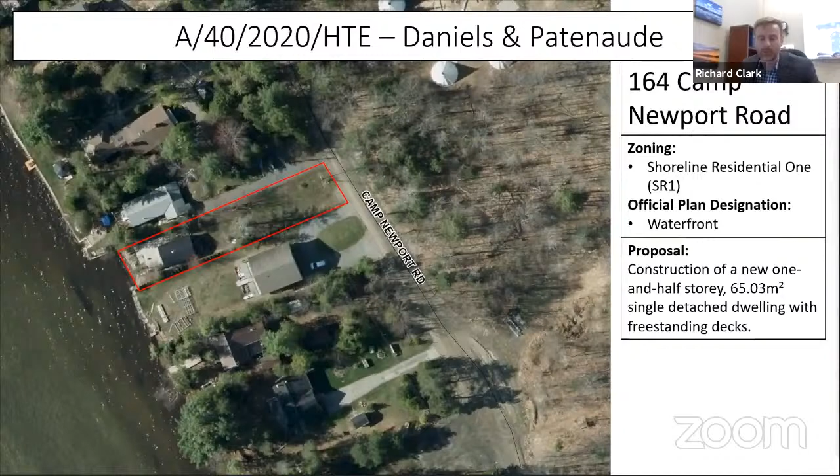And I'll just show you that. So the dwelling is in the same location as previously proposed, as you previously saw it on July 14th. It's been made smaller, and there are now freestanding decks located in the northern side yard and front yard.

A minor variance is required to increase the primary lot coverage from 10% to just 10.4%, and to reduce the required side yard setback from 6 meters to 2.5 meters for the dwelling, on both sides.

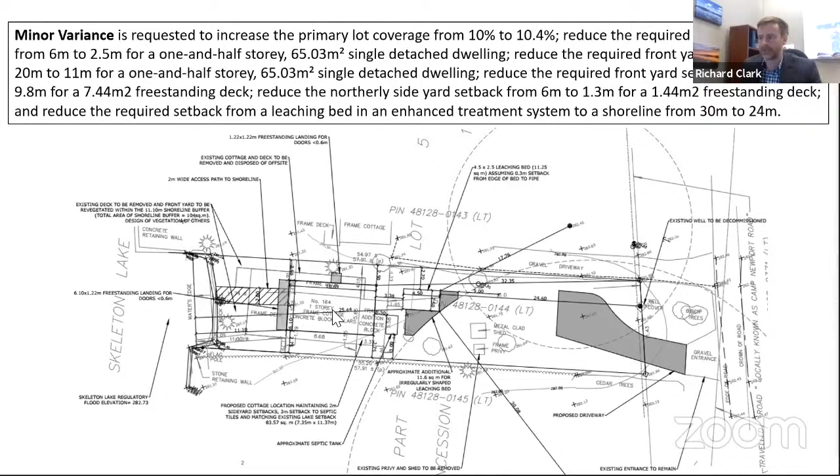Reduce the required front yard setback from 20 meters to 11 meters. Reduce the required front yard setback from 20 meters to 9.8 meters for this 7.44 square meter freestanding deck. Reduce the northerly side yard setback from 6 meters to 1.3 meters for this 1.44 square meter freestanding deck. And reduce the required setback from a leaching bed in an enhanced treatment system to the shoreline from 30 meters to 24 meters, and that's this setback here.

As previously noted, a 67.85 square meter one-story dwelling with a 66.64 square meter attached deck, a 3.39 square meter shed, and a 1.63 square meter privy toilet existed on the property prior to the fire. However, not all aspects of the structures that existed on the property prior to the fire would have been legal non-complying, as it appears additions to expand the footprint of both the dwelling and deck occurred without approvals.

As committee was advised on July 14th, 2021, if the dwelling and deck additions are assumed not to have been established on the site lawfully, the legal non-complying dwelling and deck aspects would be reduced to approximately 49 meters squared and 34 meters squared, implying that the existing lot coverage of 13.28% existed on the property for legal complying and non-complying structures prior to the fire.

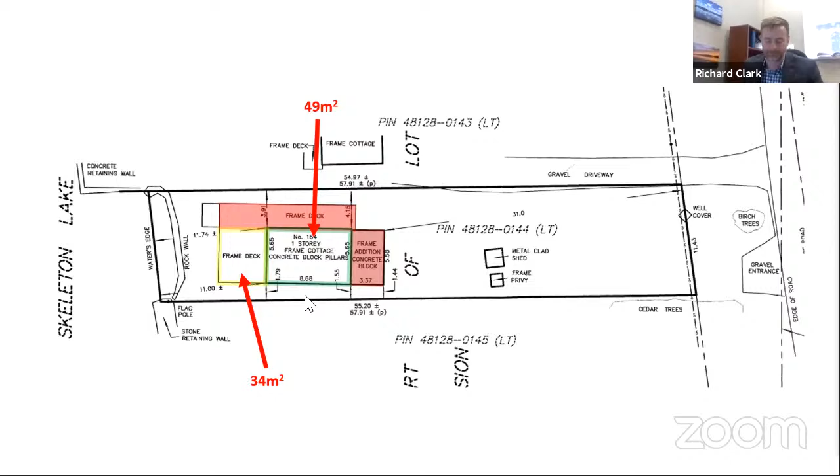This slide shows the July 14th proposal and the October 13th proposal side by side to help illustrate the redesign. The new proposed smaller dwelling, down from 83.57 meters squared to 65.03 meters squared, maintains a 2.5 meter setback, whereas before it was 2 meters on both the north and south side, to address concerns raised by abutting landowners.

Also to address concerns from abutting landowners, the detached garage is no longer proposed. To facilitate the reduced width of the dwelling, a side entrance is proposed on the north side of the dwelling and at the front facing Skeleton Lake. This was to save space by eliminating the need for a central hallway in the building. Freestanding decks associated with these entrances are proposed to permit these entrance locations, with projections of 1.2 meters into the north and west of the dwelling.

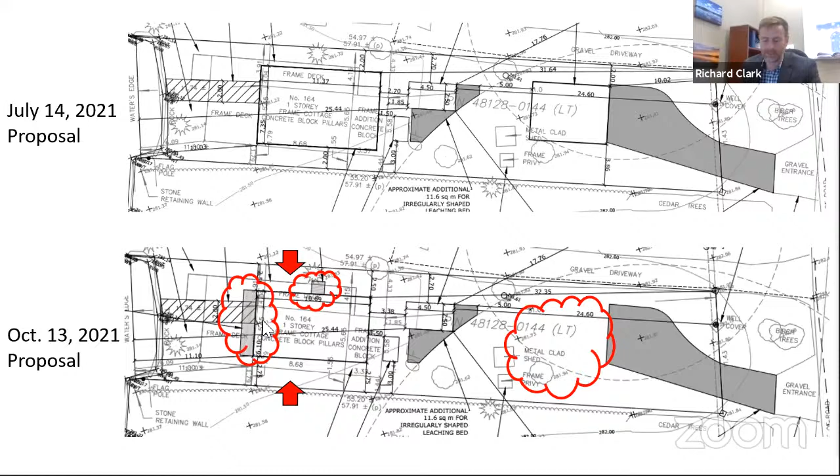The redesigned dwelling is shown here. Elevations show a cottage that has been redesigned at a significantly reduced scale to address the site constraints and match the surrounding neighborhood character. While the redesigned dwelling is still encroaching within the 30-meter setback and 15-meter wide shoreline buffer, the smaller scale of the dwelling implies that these encroachments are now reduced over what had previously been proposed.

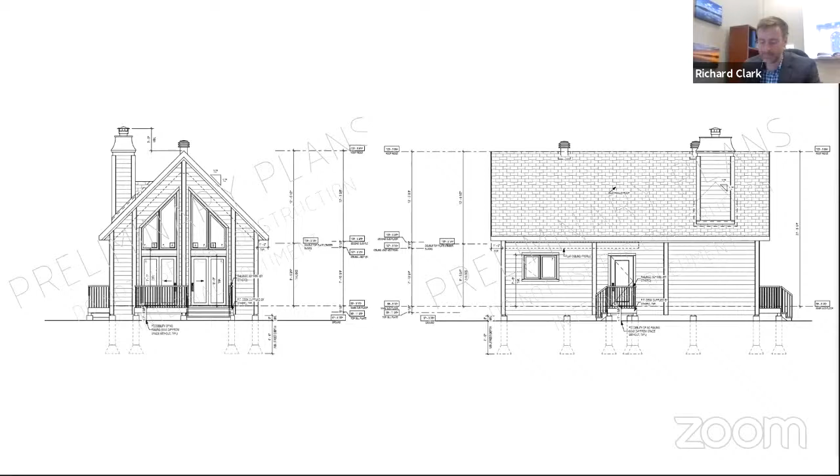Additionally, the landowner has agreed to undertake revegetation between the proposed new dwelling and the lake, as well as elsewhere on site where space permits, to offset the area of encroachment within the typically required shoreline buffer and setback. Given that a septic system with enhanced treatment and site revegetation within the buffer and elsewhere is now proposed, staff are of the opinion that the applicant's modified proposal provides appropriate compensating measures, which are required in town official plan policies where development is proposed within 30 meters of a cold water lake or lake trout habitat.

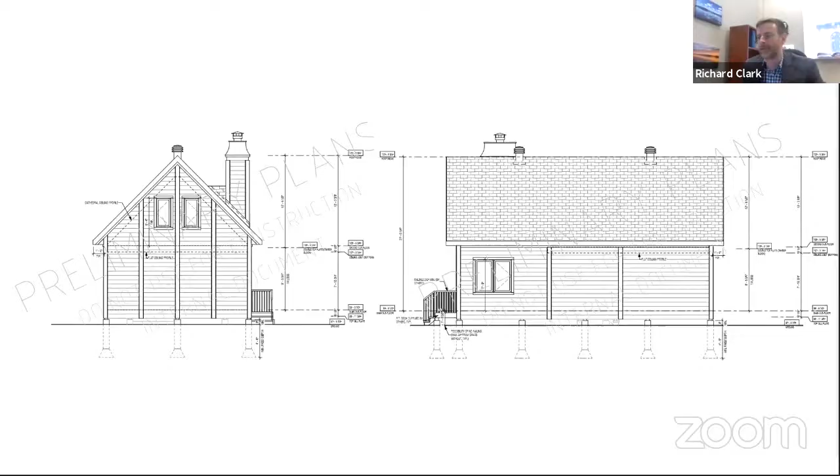The application was circulated in accordance with the provisions of the Planning Act and the Skeleton Lake Association, and no written comments were received. It's noted that letters of support were provided by the abutting landowners, who were individuals that previously shared concerns respecting past approvals.

The application would appear to conform to the intent of the official plan and be consistent with the provincial policy statement. Additionally, the application appears to satisfy the four tests for a minor variance as set out in section 45(1) of the Planning Act, and therefore staff are recommending conditional approval. A condition relating to the implementation of required revegetation measures through site plan control is recommended.

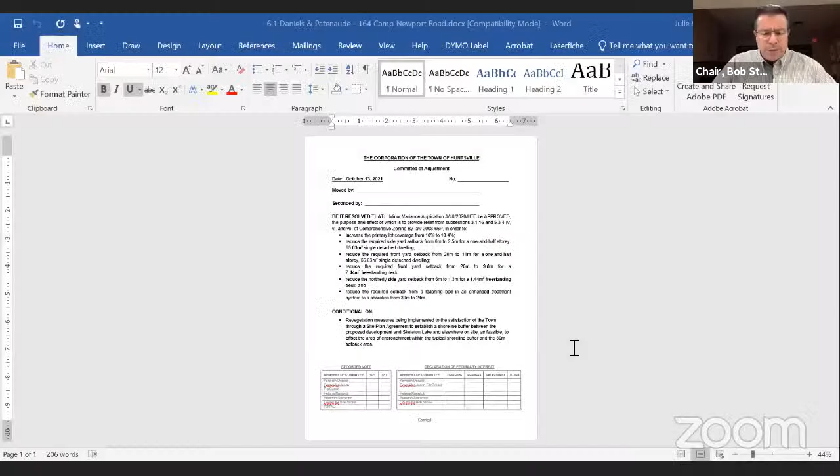I will read the resolution. Moved by Jason Fitzgerald, seconded by Brandon Stapleton. Be it resolved that minor variance application A40 2020 HTE be approved. The purpose and effect of which is to provide relief from subsection 3.1.16 and 5.3.4 of the Comprehensive Zoning Bylaw 2008-66P, in order to increase the primary lot coverage from 10% to 10.4%, reduce the required side yard setback from 6 meters to 2.5 meters for a 1.5 story, 65.03 square meter single detached dwelling.

Reduce the required front yard setback from 20 meters to 11 meters for a 1.5 story, 65.03 square meter single detached dwelling. Reduce the required front yard setback from 20 meters to 9.8 meters for a 7.44 square meter freestanding deck. Reduce the northerly side yard setback from 6 meters to 1.3 meters for a 1.44 square meter freestanding deck. And reduce the required setback from a leaching bed in an enhanced treatment system to a shoreline from 30 meters to 24 meters, conditional on revegetation measures being implemented to the satisfaction of the town through a site plan agreement to establish a shoreline buffer between the proposed development and Skeleton Lake, and elsewhere on site as feasible, to offset the area of encroachment within the typical shoreline buffer and the 30-meter setback area.

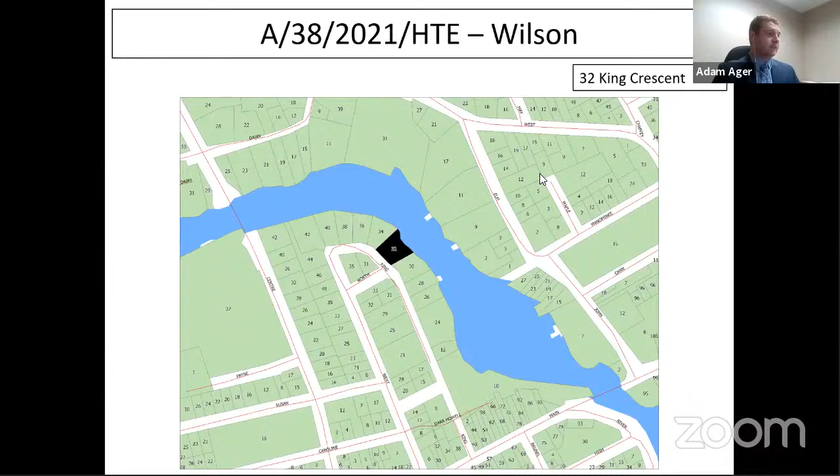Through you, the subject property is located at 32 King Crescent. The lot is designated urban shoreline residential, and the lot is zoned residential 1. An application has been submitted to recognize the location of a retaining wall within the shoreline buffer, and also increase the accessory lot coverage from 5% to 5.13% for the proposed floating dock. So here on the sketch, you can see there are 2 retaining walls, existing on site now, outlined in this dark gray color. And then the addition for accessory structure is this proposed floating dock located here on the sketch.

Section B of the official plan requires lot frontages to be maintained in a natural state to a depth of 15 meters where new lots are being developed. It also states that where lots are already developed or further development is proposed within this urban shoreline residential area, these targets should be achieved to the furthest extent possible. Where these requirements cannot be met, a net improvement over the existing situation is required. Given the location and scale of these being within the 15 meters, staff are of the opinion this development does not represent a net improvement to what was previously there, and this policy is not being maintained.

Further to that, during the installation of the retaining wall, it was determined that the integrity of a butternut tree, which is an endangered species under the Endangered Species Act, was compromised. Staff are recommending consultation with the Ministry of Environment, Conservation and Parks, specifically regarding the applicable requirements of the Endangered Species Act concerning this tree potentially impacted by the retaining wall construction.

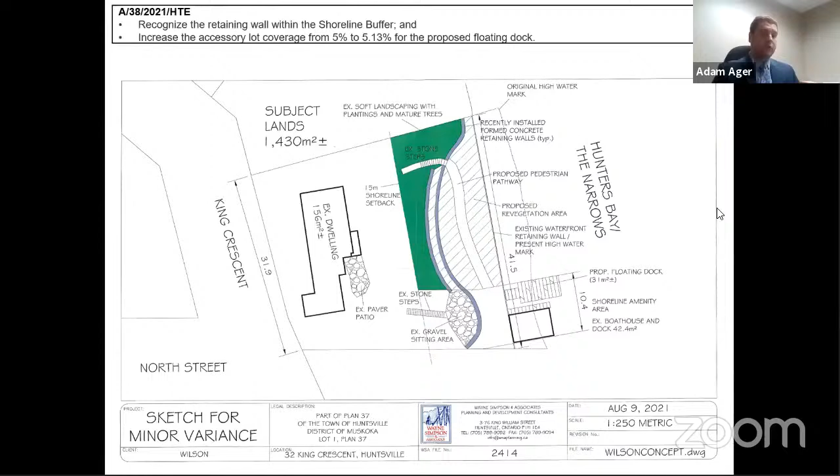A condition has been included to ensure that future works benefit from the site plan control process. Here are some site photos showing the scale of the accessory structure or retaining wall. As you can see, it's in two tiers, and the entire shoreline area is now gravelled as well. Here are some more photos.

The application was circulated in accordance with the provisions of the Planning Act, including to the Vernon Ferry Lake Association. No comments have been received.

Staff are of the opinion that a portion of the minor variance respecting the recognition of the retaining wall within the shoreline buffer is not a minor variance, does not meet our official plan policies, and does not satisfy the four tests of a minor variance. As a result, staff are recommending that that portion of the application be denied.

Further, with respect to the application for increased accessory lot coverage, staff are of the opinion that that portion of the variance application is minor in nature and satisfies the four tests of a minor variance, and should be approved for the floating dock only, conditional on removal of the non-complying retaining wall and revegetation to establish a suitable shoreline buffer within 15 meters of the Muskoka River shoreline. And lastly, conditional on consultation with the Ministry of Environment, Conservation and Parks regarding the butternut tree.

And I'd be happy to answer any questions you may have.

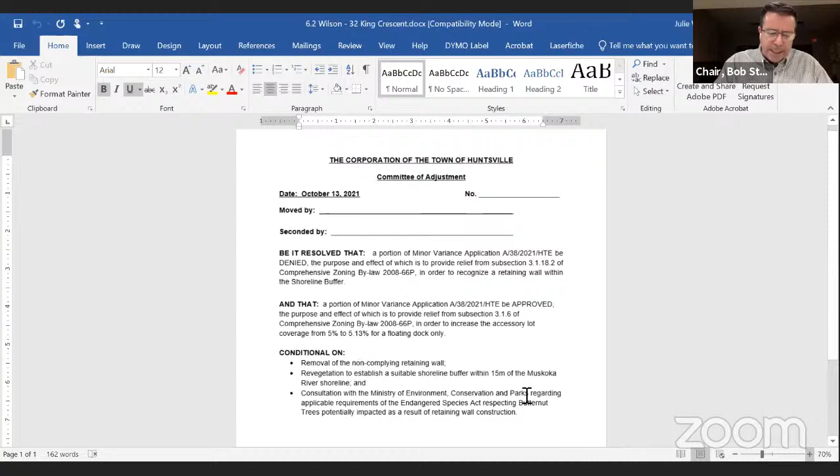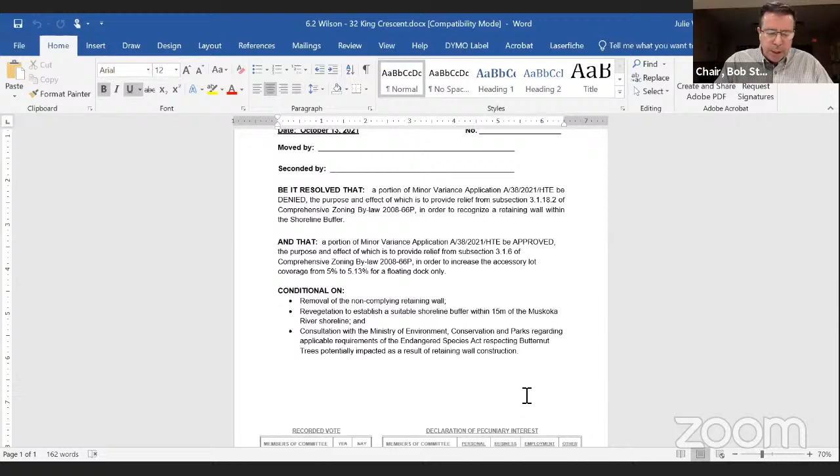The purpose and effect of which is to provide relief from subsection 3.1.18.2 of the Comprehensive Zoning Bylaw 2008-66P in order to recognize a retaining wall within the shoreline buffer, and that a portion of the minor variance A 38/2021 HTE be approved. The purpose and effect of which is to provide relief from subsection 3.1.6 of the Comprehensive Zoning Bylaw 2008-66P in order to increase the accessory lot coverage from 5% to 5.13% for floating dock only.

Conditional on removal of the non-complying retaining wall, revegetation to establish a suitable shoreline buffer within 15 meters of the Muskoka River shoreline, and consultation with the Ministry of the Environment, Conservation, and Parks regarding applicable requirements of the Endangered Species Act respecting butternut trees potentially impacted as a result of the retaining wall construction.

All in favor? And that's carried.

Thank you, Adam. We are now moving on to the next application, the Schurr and Matutat application. That's fun to say.

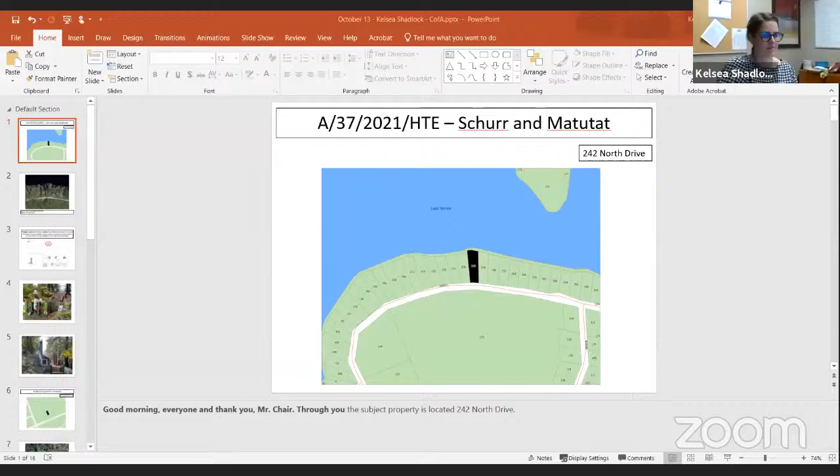Thank you, Mr. Chair, I'll just share my screen. Are you able to see? Yep, thank you. Good morning, everyone, and thank you, Mr. Chair.

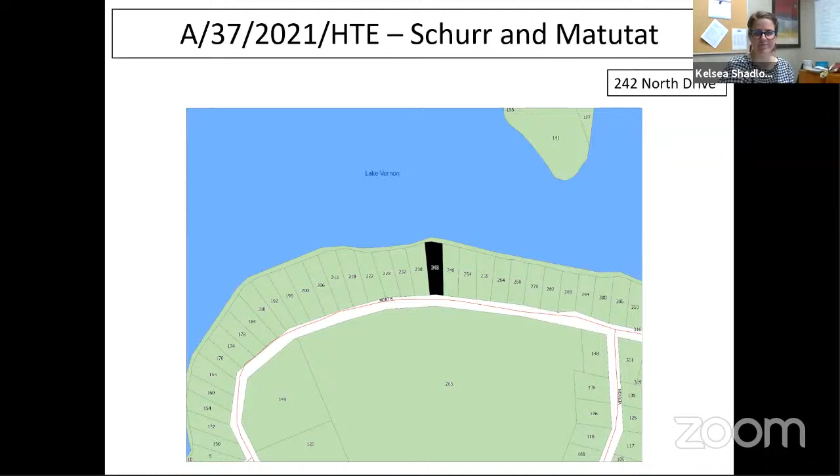Through you, the subject property is located at 242 North Drive. The lot is designated waterfront and is zoned shoreline residential 1. The application has been submitted to permit the construction of a 25.6 square meter four-season sunroom addition. A minor variance is required to decrease the 6-meter required interior side yard setback to 3.9 meters for the sunroom addition only.

The SR1 zone requires a 6-meter interior side yard setback for single detached dwellings. The purpose of this provision is to ensure adequate distancing between development on abutting lots and to create a buffer between properties. The proposed sunroom addition is compliant with all other required setbacks and lot coverage. Additionally, the sunroom addition is buffered by existing vegetation and is replacing a portion of a non-compliant deck.

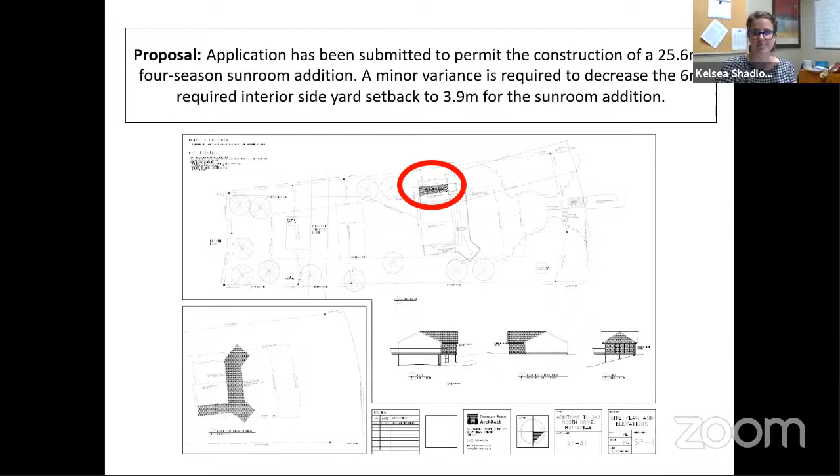The subject lands are included in the waterfront designation of the official plan, which anticipates low density shoreline residential development that respects the character of the natural setting of the waterfront area. For this proposal, there will be minimal visual impacts from the water as the sunroom addition will be hidden by existing vegetation. The sunroom addition reflects the scale of the dwelling and surrounding waterfront character. Additionally, the sunroom addition is sited in the most appropriate location as it maintains existing building lines and is in a partially cleared area and does not encroach into the front yard setback.

Just going back a bit - the natural constraint mapping identifies deer wintering habitat and unevaluated fish habitat in the front of the property. To address these natural constraints, a fish habitat and deer wintering habitat assessment was completed by Riverstone Environmental Solutions, Inc. The report provides the background of fish habitat and deer wintering habitat, as well as an overview of the site conditions. The report concludes that there is a low likelihood of negatively impacting the fish and wildlife habitat and characterizes the fish habitat as type 2.

Recommendations including the implementation of construction mitigation measures to further reduce any disturbances in the riparian area and the retention of existing tree cover will be implemented through site plan control should the minor variance be approved. The application has been circulated in accordance with the provisions of the Planning Act and to the Lake Vernon Association. Three letters of support were provided to committee prior to this meeting. The application would appear to conform to the intent of the official plan and be consistent with the provincial policy statement. The application appears to meet the four tests of a minor variance and therefore staff are recommending approval. Thank you, and I'd be happy to answer any questions you may have.

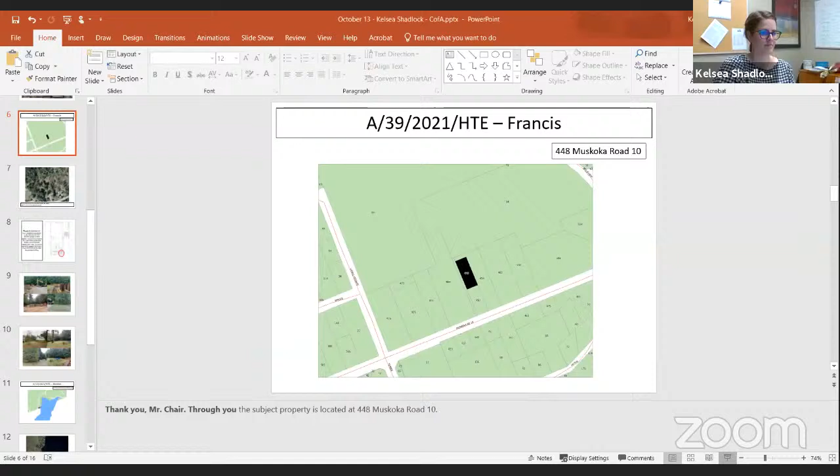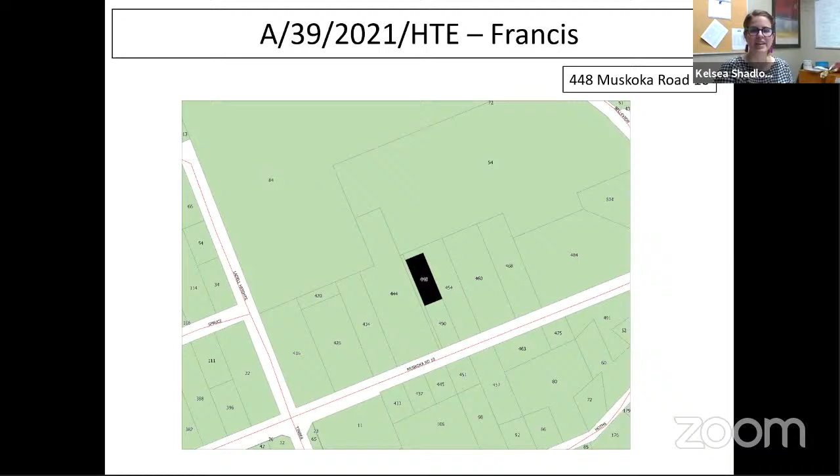Well, thank you again, Mr. Chair. Through you, the subject property is located at 448 Muskoka Road 10. The lot is designated community residential and is zoned residential 1 exception 0206.

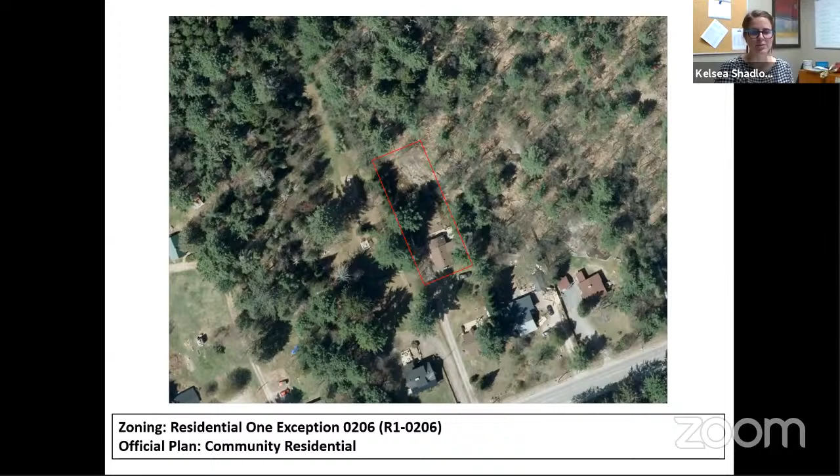The application has been submitted to permit the construction of a 26.75 square meter detached garage. A minor variance is required to recognize the south lot line as the front lot line, reduce the front yard setback from 7 meters to 1.5 meters, and to permit a garage to be located closer to the front lot line than the principal dwelling.

The site-specific exception permits the existing lot area and lack of frontage. A consent application in 2013 adjusted the lot line between the two existing undersized lots that were developed as a front road abutting lot and a back lot. A zoning amendment in the same year recognized 0 meters of frontage on the municipally maintained road and the lot area of the subject property.

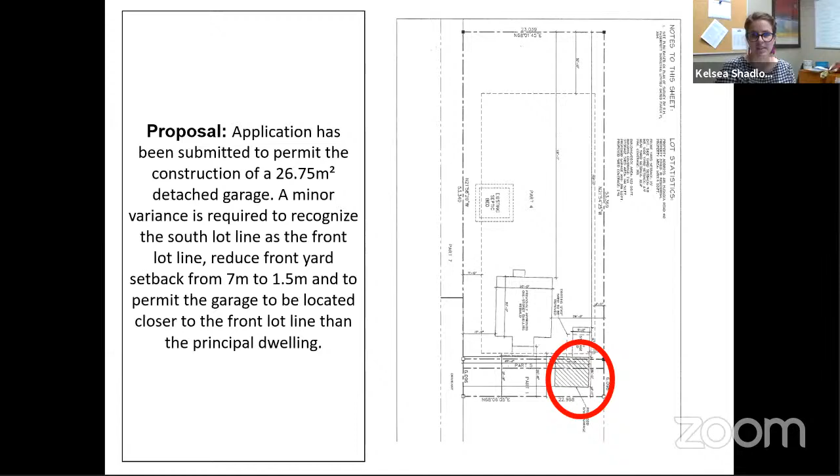The previous applications did not assign any setbacks to the lot line. Therefore, the recognition of the south lot line as the front lot line is important for the relief sought, as well as for any future development.

With regards to the requested relief, the general provisions of the town's zoning bylaw require that detached garages be located no closer to the front lot line than the principal dwelling. The purpose of this provision is to ensure adequate setbacks and sight lines are maintained, and further that the street presence and character are consistent.

Relief is also required to reduce the front yard setback for the proposed detached garage. The intention of this setback is to ensure adequate distancing between developments on abutting lots and to create a buffer between properties and the road.

In this instance, the proposed detached garage will be hidden from the road by the abutting lot, mitigating potential adverse impacts with respect to visual, traffic, and safety impacts. Additionally, the location of the garage is informed by the existing conditions and is within a previously developed area. There's also a small vegetated area on the east side of the south lot line, which helps screen the proposed garage from the abutting property.

The subject lands are designated community residential within the official plan. Within this area, permitted uses shall be limited to low density residential, and the continued residential use is in keeping with the official plan.

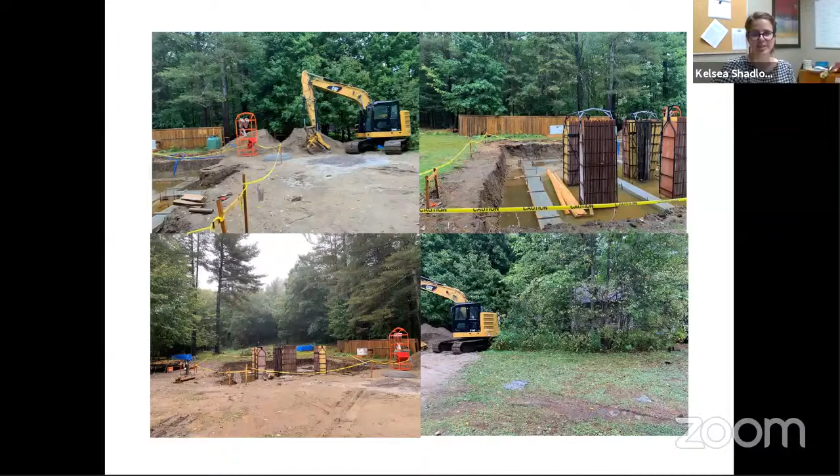The application was circulated in accordance with the Planning Act. No concerns or objections have been raised. The Planning Department had no objections. However, they note that the footprint of the property line needs to be pinned by an Ontario land surveyor.

Therefore, the application would appear to conform with the intent of the official plan and be consistent with the provincial policy statement. The application appears to satisfy the four tests of the minor variance, and staff are recommending approval. Thank you so much, and I'd be happy to answer any questions you may have.

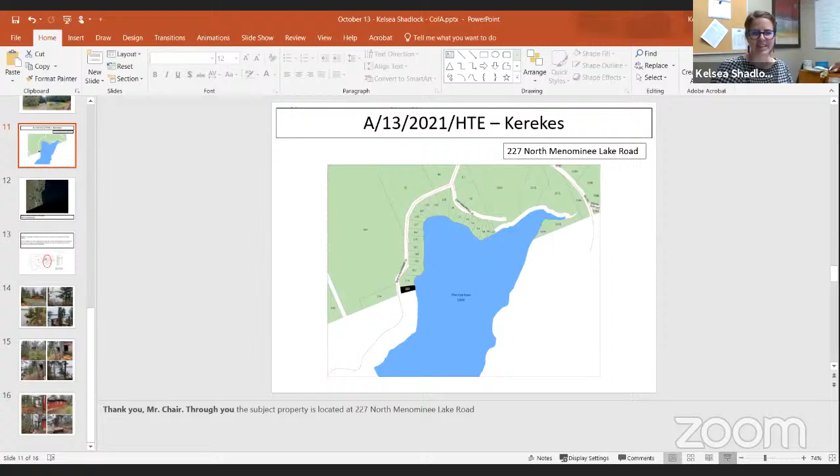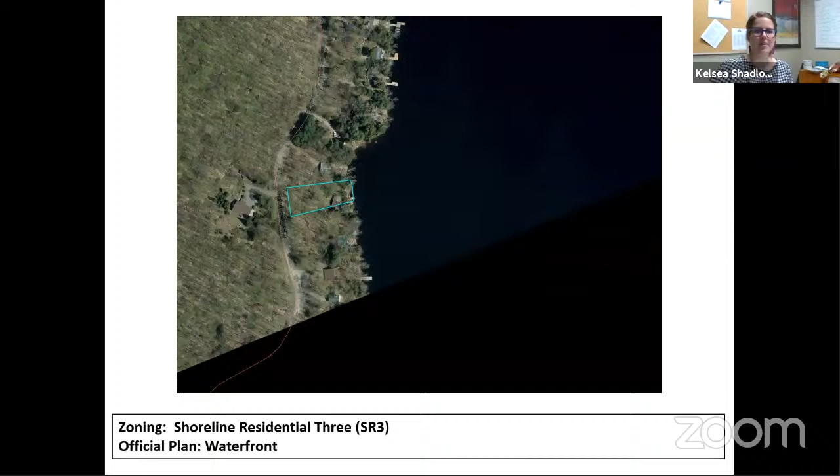Thank you again, Mr. Chair. Through you, the subject property is located at 227 North Menominee Lake Road. The property is zoned Shoreline Residential 3 and is designated waterfront. The application was originally presented to committee on May 12th of this year. The application was submitted to permit an addition to an existing non-complying dwelling. A minor variance is required to recognize the non-complying side and front yard setbacks for the existing deck and dwelling, in addition to permit a further reduction to the front yard setback and increase primary lot coverage for the proposed 45.2 square meter addition as seen in the sketch.

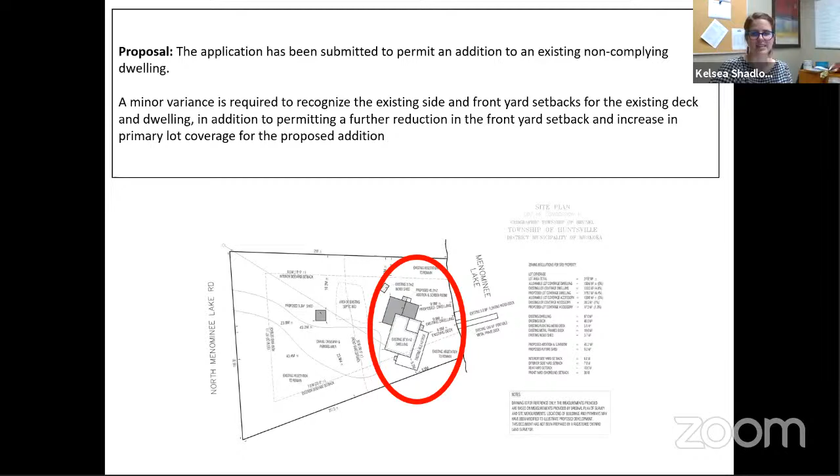The original Development Report 2020-150 discussed relevant town, district, and provincial planning policies, as well as zoning provisions applicable to the application. Staff recommended denial as there was no fish habitat assessment submitted to satisfactorily address the fish habitat protection policies. The application has now provided a fish habitat assessment, which has been reviewed and has updated the presentation and report.

The assessment provided a background on the Lake Menominee fishery and site conditions. Based on the observations of the report author, they characterized the shoreline fish habitat as type 2 and stated the existing shoreline vegetation is in excellent condition. The report also concludes that with the recommended mitigation measures, there will be a net benefit to the water quality of Lake Menominee relative to existing conditions.

The recommendations, including the maintenance of existing vegetation and site-specific stormwater and erosion management, will be implemented through site plan control should the minor variance be approved. Approval is also conditional on the reduction of accessory lot coverage to ensure the proposal is more in keeping with the intent of the zoning bylaw.

To address the slope-related constraints, the development is sited on an appropriate flatter portion of the property, and mitigation measures to minimize vegetation removal outside of the building envelope and ensure tree preservation will also be implemented through site plan control should the minor variance be approved.

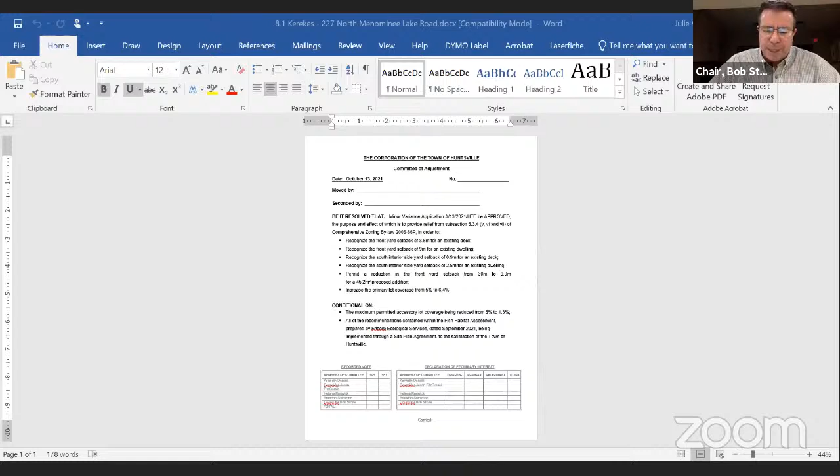Moved by Jason Fitzgerald, seconded by Brandon Stapleton. Be it resolved that minor variance application A13 2021 HTE be approved. The purpose and effect of which is to provide relief from subsection 5.3.4 of the Comprehensive Zoning Bylaw 2008-66P, in order to recognize the front yard setback of 8.5 meters for an existing deck, recognize the front yard setback of 9 meters for an existing dwelling, recognize south interior side yard setback of 0.9 meters for an existing deck, recognize the south interior side yard setback of 2.5 meters for an existing dwelling, permit a reduction in the front yard setback from 30 meters to 9.9 meters for a 45.2 square meter proposed addition, and increase the primary lot coverage from 5% to 6.4%, conditional on the maximum permitted accessory lot coverage being reduced from 5% to 1.3%.

All of the recommendations contained within the fish habitat assessment prepared by Frycor Ecological Services, dated September 2021, being implemented through site plan agreement to the satisfaction of the Town of Huntsville.